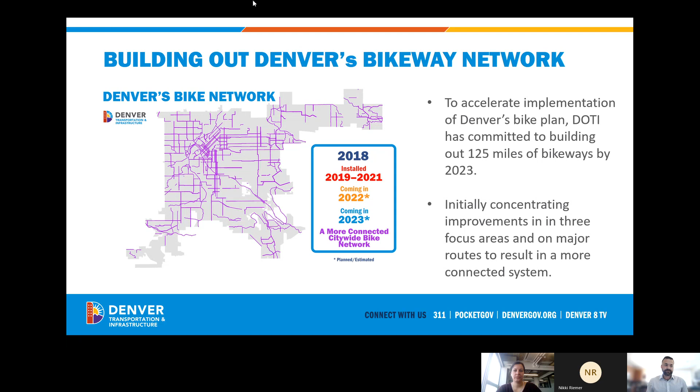Today we're really focused on the central area in Denver. I mentioned we're focusing on 3 focus areas. Currently for this presentation we're focused on central Denver, which includes 25 miles of bikeways identified from the 2011 Denver Moves Bicycles Plan, updated again in 2015. We started concept designs for these projects back in 2020 and then refined them through community input and outreach in 2021. The design and construction of those projects is broken out into 2 separate phases.

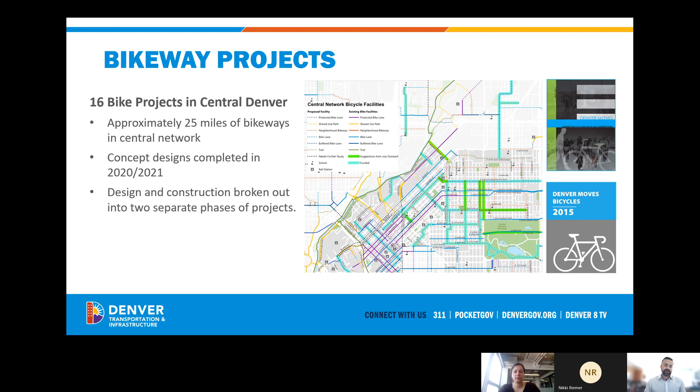There are a lot of different projects associated with this process. As I just mentioned, there were 16 of them altogether. So we have broken out the construction into 2 different phases.

In 2020 and 2021, we started and finalized the design for projects in the first phase, including the 25th Avenue Neighborhood Bikeway, Lawrence Street Neighborhood Bikeway, and the remaining projects listed here. We took these projects to the community last spring to get their feedback on the 60% designs, and those projects have continued to advance through the design phase and are now nearing construction.

So if you've been following this process and wondering when you'll start to see construction of those projects, the answer is relatively soon. These projects are scheduled to be constructed sometime this year, in 2022, and it's likely you would see them being constructed starting later this summer or early fall.

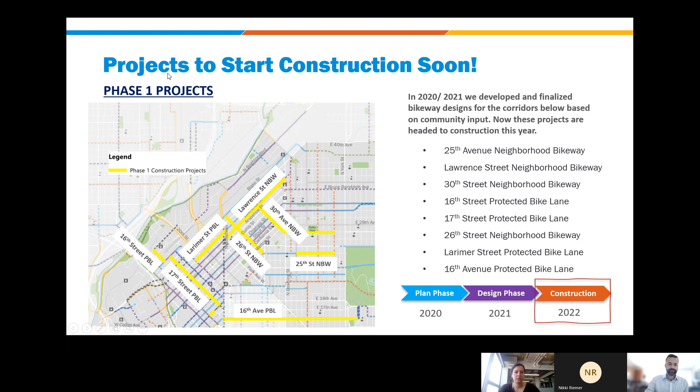For our second phase of projects, we're looking to get your feedback currently. We started the design and concept planning for these back in 2020, and they're now ready to advance to the final design stages, currently in the 60% design stage. These are the next round of projects we're looking for community input on, and they'll be headed to construction in 2023. We'll be getting community feedback, advancing the designs this summer, and these projects are planned for 2023.

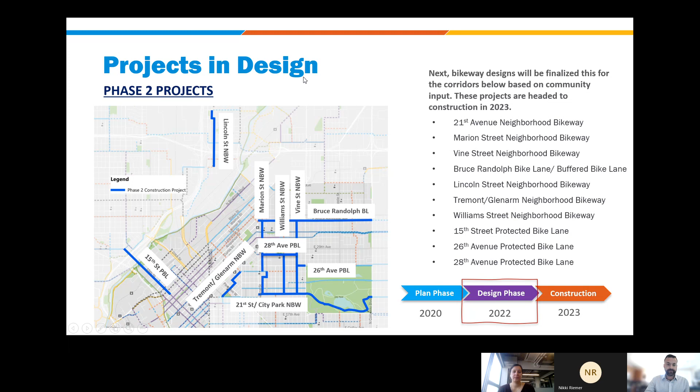Overall, as for the project timeline, this whole process kicked off back in March 2020, through numerous community stakeholder meetings comprised of various community organizations, neighborhood organizations, as well as active community members and community leaders. We've had numerous stakeholder meetings, and in addition, quite a few public and community meetings or open houses to learn about these projects and provide more feedback.

This is our 5th public open house on the Central Community Transportation Network process, and we look forward to wrapping up the final designs later this summer. As mentioned, you'll start to see construction of these projects happening this year and completing next year.

So I do have some major project updates, and that's what we're going to transition to next. The one project I want to start talking about first is Bruce Randolph.

Between Downing and Steele, a bike lane was originally proposed from the 2011 Denver Moves Bicycles plan. Based on some feedback we received, we looked into making this a protected bike lane, and that concept design was shared with the community last year as well as the year before. However, based on community response from that project, we found a need to balance the facility type with the needs of the community, so we've actually revised the designs back to a striped bike lane as it was originally proposed, instead of a protected bike lane.

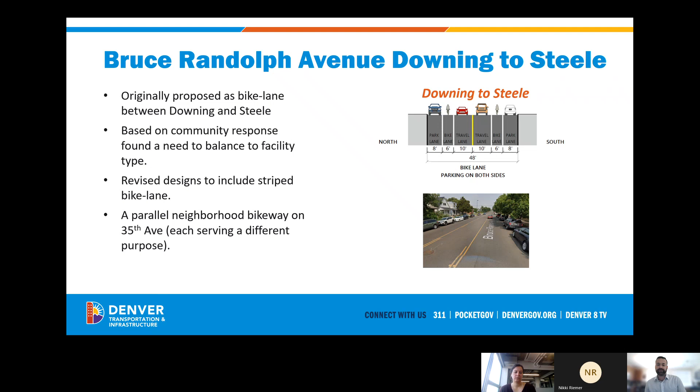On Bruce Randolph, providing a bike lane here will provide bicycle access to businesses. This will also increase the visibility of bicycles and pedestrians by slowing down vehicle speeds. By removing the center turn lane that exists today, this will help narrow the roadway and create a roadway character that discourages speeding and makes it more visible and friendly to both bicycles and pedestrians.

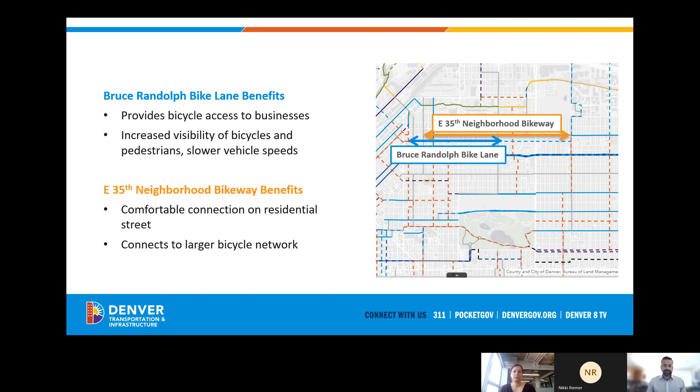For East 35th, this is proposed to complement the bikeway on Bruce Randolph by also adding a high comfort connection on a residential street that would do a good job of connecting to our larger bicycle network, as you can see on the map below. This bikeway would also connect to planned or recently constructed bikeways in the Central Park neighborhood and provide more of a regional connection. We see both of these projects as having benefits because while they're on different roads, they also serve different purposes.

On Steele to Colorado on Bruce Randolph, the street's a little bit narrower because we don't have the center turn lane in this section of the roadway.

What is recommended here, I'm going to point to this chart on the right of the screen. DOTI uses this chart to determine the appropriate type of bikeway based on traffic volume or speeds on a particular street, and that tells us whether it's appropriate for a neighborhood bikeway, a buffered bike lane, a bike lane, or something that needs to be fully protected.

Based on the numbers we were seeing for speeds and volumes on Bruce Randolph, that told us a buffered bike lane is more preferred or ideal on the street. In order to achieve that, removing parking on one side of the street would be an impact of being able to construct this project.

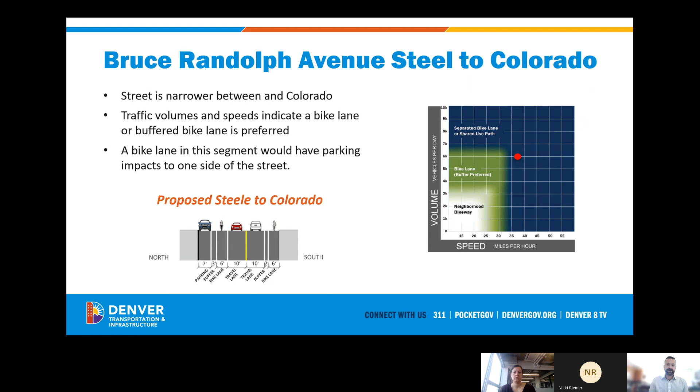Currently, what we're proposing is to keep parking on the north side of the street, based on data and some parking counts that I'll show you on the next slide.

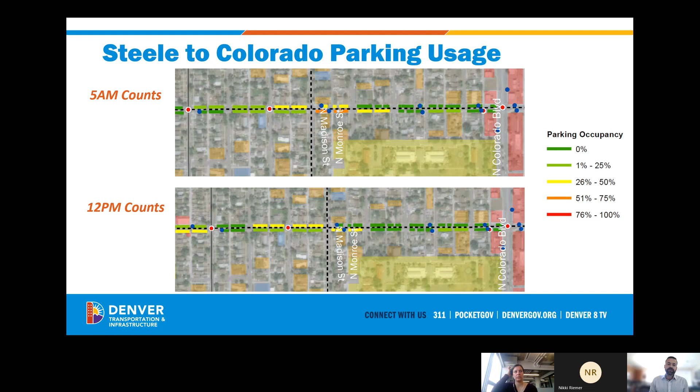Then for 26th Avenue from York Street to Vine Street, that's the next project I want to give a quick update on. This would provide a high comfort connection across York Street, connecting to the existing bike lane on East 26th that runs along the City Park Golf Course, and providing a safe, high comfort connection to the neighborhood bikeway that runs north and south on Vine Street. When we took a look at this, we found that the volumes and speeds of traffic on 26th indicate that a fully separated bikeway is preferred.

In order to fit either a protected bike lane or even just a bike lane in general, that requires removing parking on both sides of the street between York and Vine. So again, just because of the traffic volumes and speeds, fitting in a fully separated or dedicated space for bicyclists in this connection requires the parking removal.

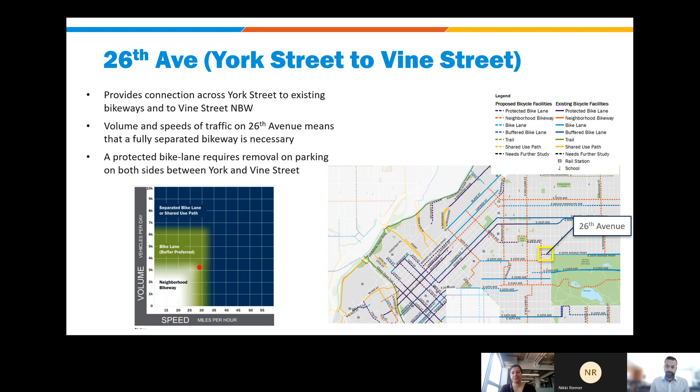A couple of quick things I wanted to point out for 26th Avenue. When we look at these projects, we're also looking at not only how we can make the street safer and more friendly for bicyclists, but how we can also make improvements for pedestrians as well.

One of the things incorporated into the design as part of this project are curb extensions, designed to increase visibility for pedestrians crossing the street, as well as narrow the distance a pedestrian has to cross. The other benefit is that these also help slow down turning vehicles, which improves pedestrian safety.

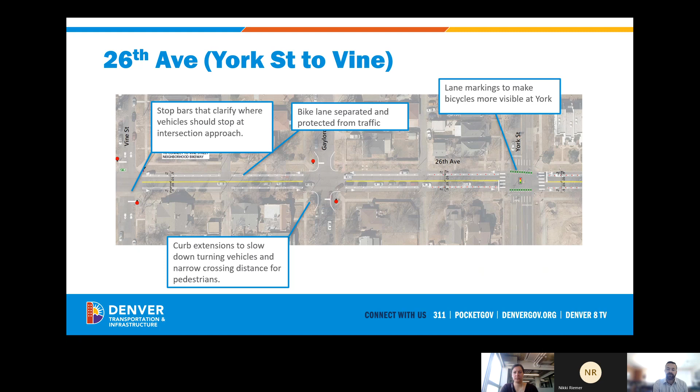A couple other things you might notice as part of this design are the protected bike lane, where bikes would be fully separated from and protected from traffic in this segment, and special lane markings that would help make bicycles more visible at York Street.

Again, we look at parking utilization when doing an inventory to understand when a parking trade-off is necessary as part of a bike project. We went out at 5 a.m. during the weekday to understand how parking utilization currently operates, and the graphic on the screen shows that parking utilization was fairly low during this hour.

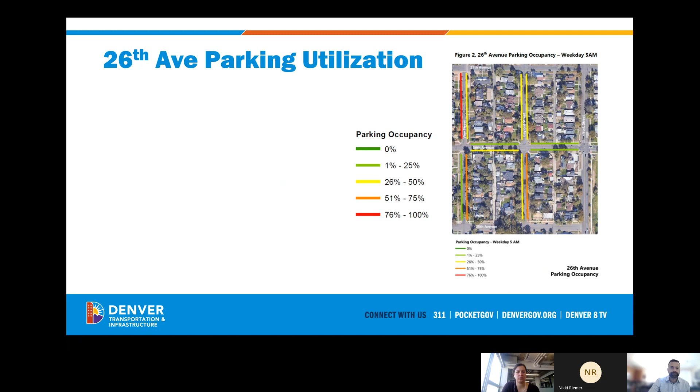The next project I'll update is 28th Avenue from Downing to Vine Street. This again is proposed as a protected bike lane, providing a connection overall to our larger bicycle network, creating connections between 5 Points and some of the north-south routes currently on the screen. A concept for this project was developed through community input in 2020.

On this street, although volumes are pretty low, speeds are just a little bit higher than we'd like to see. That's why a protected bike lane is proposed. Adding a protected bike lane would help narrow the roadway, and putting in bike infrastructure to narrow the travel way has been shown to reduce vehicle speeds. So one benefit of providing this protected bike lane is slower speeds and a higher comfort street for both bicycles and pedestrians.

In order to achieve a protected bike lane on 28th Avenue, parking impacts are expected on the north side of the street, based on needing to make that trade-off in order to make the bike lane fit into the street.

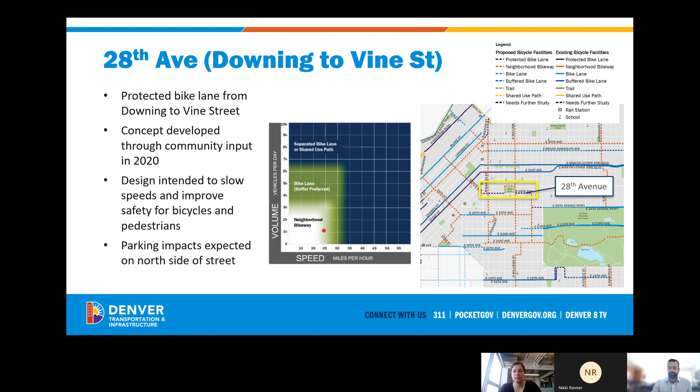We looked at the parking utilization on 28th Avenue during 5 a.m. Between Downing and Vine, you'll see on this image what the parking utilization looked like.

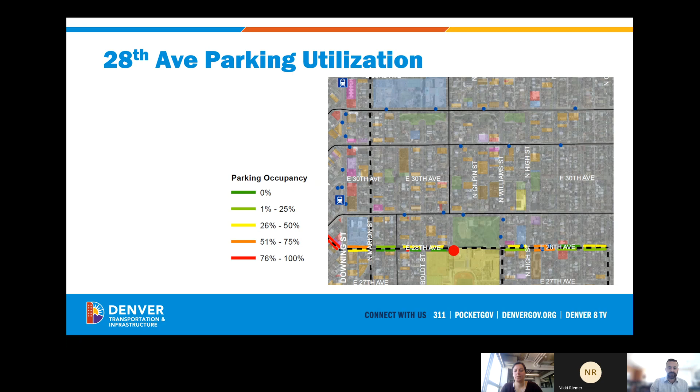So just to quickly show some design features, this gives a preview of what the protected bike lane would look like. We'll also be adding curb extensions, like described earlier, to increase pedestrian safety and visibility. This diagram also shows where the parking would be removed and the overall design of the protected bike lane.

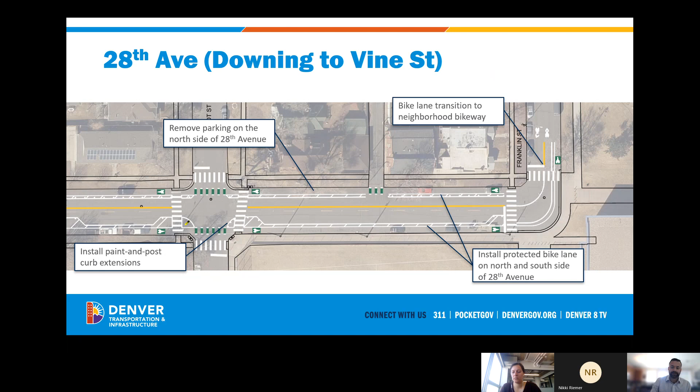Next, we're going to be talking about 60% designs for the remaining projects, which are all neighborhood bikeways. We have quite a few projects that we're looking for feedback on, and we have a special tool we'll talk about in just a moment that allows you to go online on your own time and provide comments on those designs. But first, I'm going to transition over to Nikki, who's going to talk about the remaining projects.

And she's going to start by talking about what a neighborhood bikeway is, just in case you need a reminder. Yeah, thanks, Riley. Do you mind muting? I think I got feedback.

Okay, great, thanks. So what is a neighborhood bikeway? Neighborhood bikeways are typically installed on streets with low volume and speeds, and they prioritize people walking and biking. Some things that can be implemented on roadways to ensure lower speeds are speed humps, traffic circles, curb extensions, and median refuge islands.

Oftentimes a lot of these streets aren't cut-through streets, they're more local streets. So we look at the volumes on the roadways and install things like diverters and speed humps as well if needed on those corridors. Neighborhood bikeways really focus on what improvements we can make at intersections and what we can do to slow speeds down mid-block.

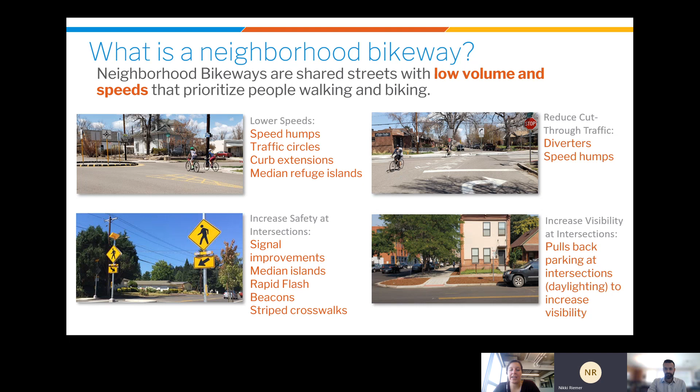Lastly, on the intersection front, I'll talk about this more later, but we use this jargony term called daylighting. Basically this means pulling parking back at intersections. You can see in this photo the no parking sign and the cars parked behind that. Those are typically placed in strategic locations so they're not so close to a pedestrian crossing that pedestrians aren't visible. We're looking at that on our corridors as well, to make sure peds and bikes are visible when crossing intersections.

So I am going to go through the neighborhood bikeways that are currently in the 60% design phase that we're looking for your feedback on. In the interest of time, I'm not going to go through each intersection and what we're proposing at each one. Riley will go through the tool you guys can utilize to look at the designs and details and provide your feedback. But I'll just go through the key features and, since the last time you heard about this project, what's changed.

So the first one is 21st Avenue Neighborhood Bikeway, and that extends from Downing to Colorado Boulevard. Some of the key features on this corridor are overall general traffic calming and curb extensions installed at Williams Street and Marion Street, and in several locations along the corridor with marked crosswalks as well. What's changed since last time you saw this concept design is that we've added a traffic circle at Gaylord Street and an eastbound traffic diverter at High Street as well.

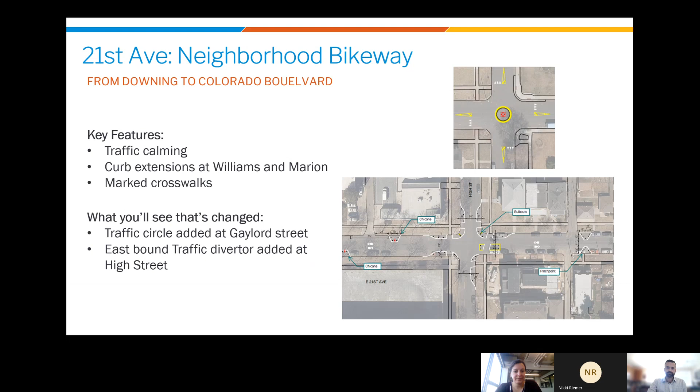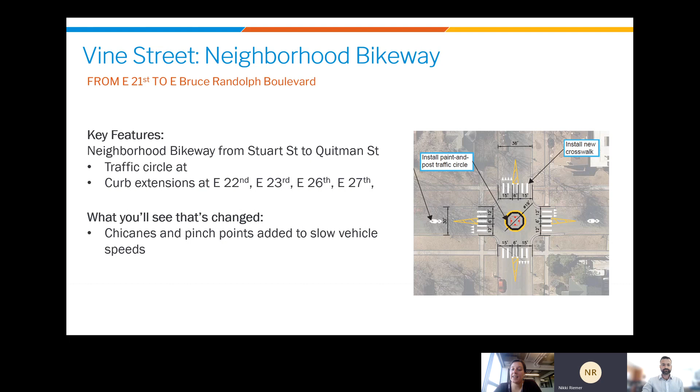The next corridor is Vine Street, and this goes from 21st Avenue up to Bruce Randolph Boulevard. On this corridor, there are traffic circles located along it, as well as curb extensions at 22nd, 23rd, 26th, and 27th. What you'll notice in this design compared to the last concept design is that there are locations throughout the corridor with chicanes and pinch points to help slow vehicle speeds along the corridor.

The next corridor is Williams Street, and this extends from 21st Avenue up to 31st Avenue. Some key features on this corridor include a traffic circle at 30th and curb extensions at 22nd, 23rd, 26th, and 27th. Again, similar to the Vine Street corridor, you'll notice more speed mitigation measures installed on this corridor, like chicanes and pinch points.

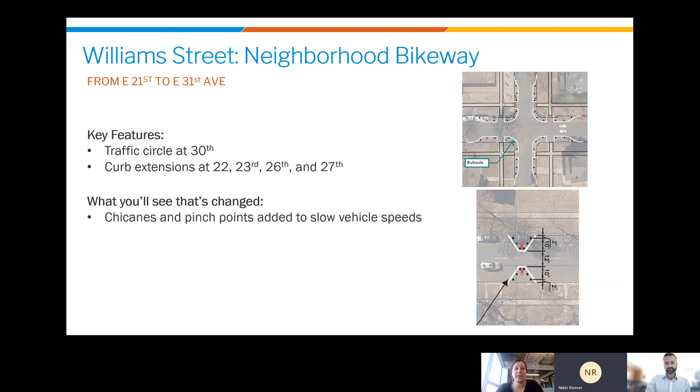The next one is the Marion Street Neighborhood Bikeway. Key features on this corridor include a traffic circle at 30th, curb extensions at several locations including 21st, 22nd, 23rd, 25th, 26th, Bruce Randolph, and Martin Luther King Jr. Boulevard, as well as a pedestrian refuge island installed at 24th Avenue. Similar theme here, you'll also see chicanes and pinch points added on this corridor to help with slowing vehicle speeds.

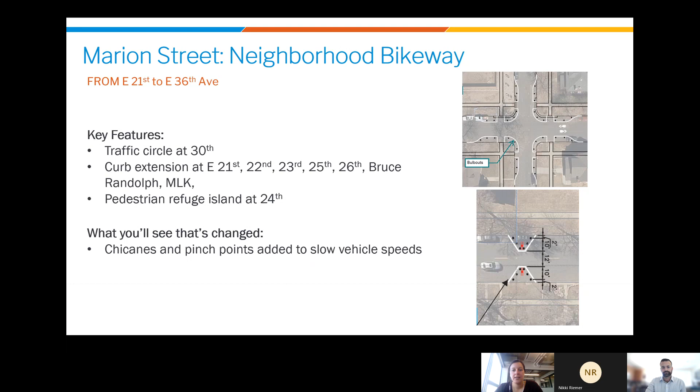And then lastly, the Tremont Glenarm Place Neighborhood Bikeway. This extends from 20th Avenue to Washington Street. There are several traffic calming features on this corridor as well, such as chicanes and pinch points. Also, the other thing we proposed on this corridor was closing the slip lane at Tremont and 20th Avenue, and also a traffic circle at 24th.

Some things you'll notice that changed: we're now proposing a westbound traffic diverter at 22nd Street. And this bottom picture displays a new ramp to connect the neighborhood bikeway along the shared use path, connecting to the 22nd Avenue bike lanes.

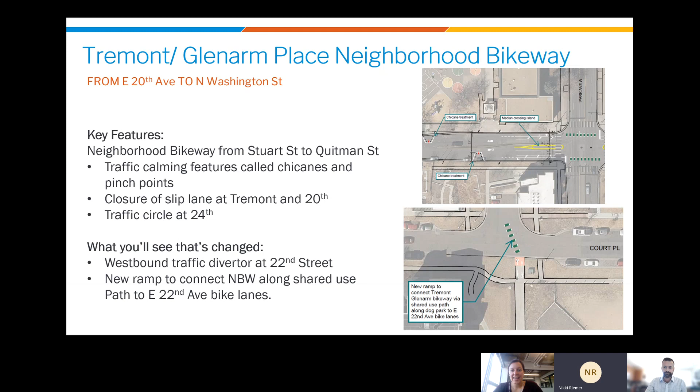So with that, I think that's the last one. I'll turn it back over to Riley to show you how to leave comments.

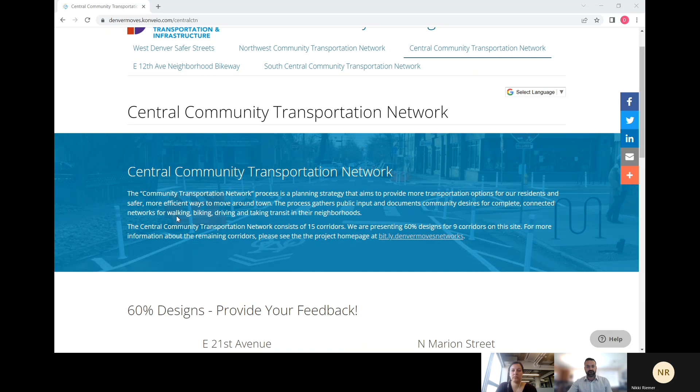The link for this is bit.ly/centralCTNcomment, and that will take you to a page that you see on my screen here. This provides an overview of all the different projects that we're asking for your feedback on. If you go to that page, you'll see all the different projects we just talked about earlier, listed along with the extents that are shown.

If you want to see the design or more information about a particular project, all you have to do is click on that project. For example, I'm going to click on Vine Street and hit View 60% Design. That will take me to the information page about the Vine Street Neighborhood Bikeway. You can read more information there about what a neighborhood bikeway is, as a reminder, and it talks about some of the different design components.

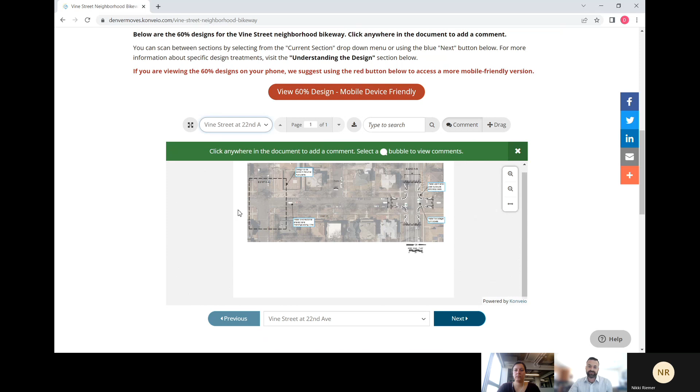In the middle of the page, it will show you the design. What I recommend doing is, if there's a particular section of the street you're most interested in, you can click on this table of contents, and it will show you the different sections of the design. So let's say I was really interested in knowing what was happening at Vine Street between 25th and 26th Avenue. I would click on that here, and that would pull up the design.

You can also use the magnifying glasses to zoom in, so you can see a little bit more information about what's actually happening on the design. We also have notes that indicate what all the different design features are.

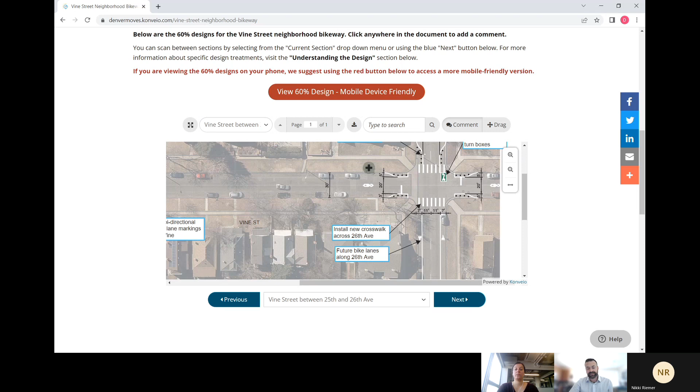If you wanted to add a comment, it's actually really easy. All you have to do is click anywhere on the page, and you'll see this little plus symbol show up. You can click on the page, and it allows you to add a comment. It is really important after you make a comment to hit Add Comment — if you don't, it will not save the comment. So once again, make sure that after including a comment on the page, you hit Add Comment to be recorded.

If you're viewing on a mobile device, you can also click on 60% Design Mobile Device Friendly. That will bring up a page that is a little bit easier to read on a phone.

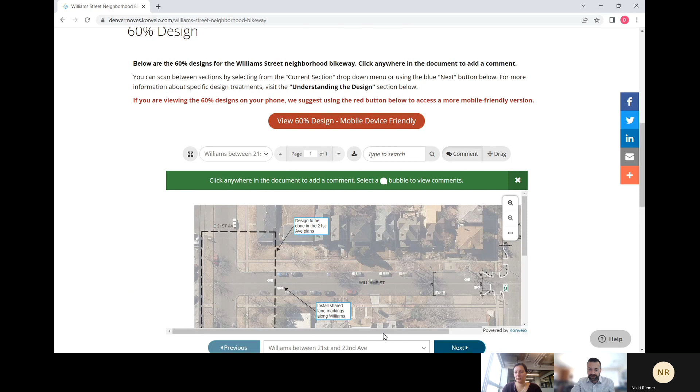So just to go through one more of these, let's say I want to look at North Williams Street, so I'll click on that. I can click to zoom into the design, and I can add my comments.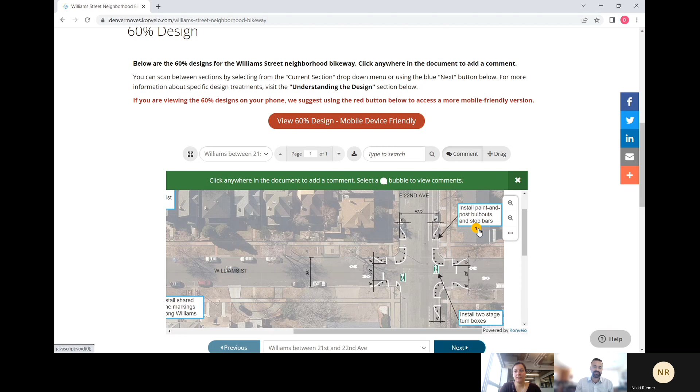Once a comment is made, you'll see it posted there, so you can go back and see the comments your other community members or neighbors have left on those pages. If you would like, you can upvote one of those comments, so you can like a comment if it's something you agree with. That's how to use this overall page.

I'll also point out that on the main design page, there's a reminder about the email address, the project hotline, and how to sign up for office hours. So with that, I'm going to transition us back to the presentation real quick. Just a moment there.

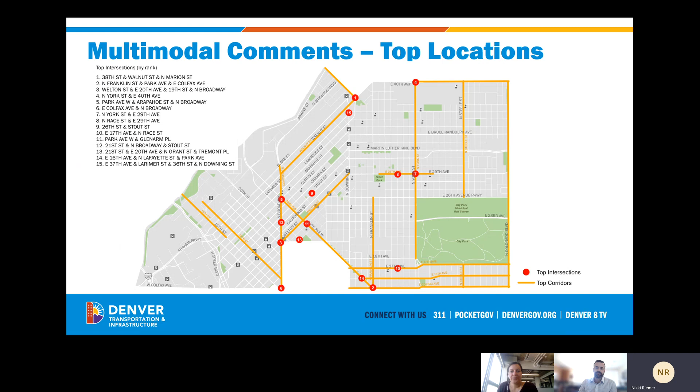So we narrowed down this list even further, which is this next map here. On this map, all of the orange dots and all of the blue lines are locations that we actually collected data on, studied in depth, and came up with recommendations.

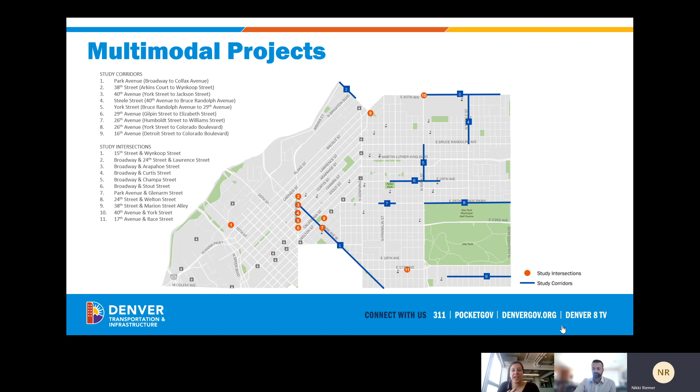To go through a summary of what some of our recommendations were, we've got them summarized by both intersections and corridors. This first slide, I'll just go over intersections at a high level.

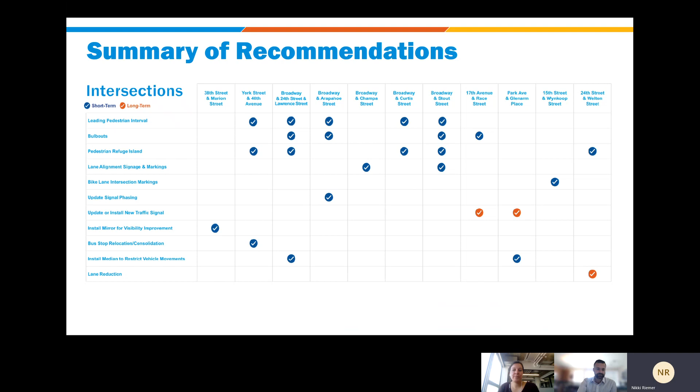One thing to note is that there's a PDF posted on the project website that goes into more depth. I'm not going to go through each intersection and what each of the improvements were, but you can use that PDF to take a more in-depth look yourself. As you can see, there are locations where we're proposing new crosswalks, leading pedestrian intervals, and bulb outs.

All of our recommendations are categorized as short-term and long-term improvements. And just to be fully transparent, for these short-term and long-term improvements and recommendations, there's currently no funding for them. So the timing for when we'll actually see these implemented is uncertain, and wanted to make you all aware of that.

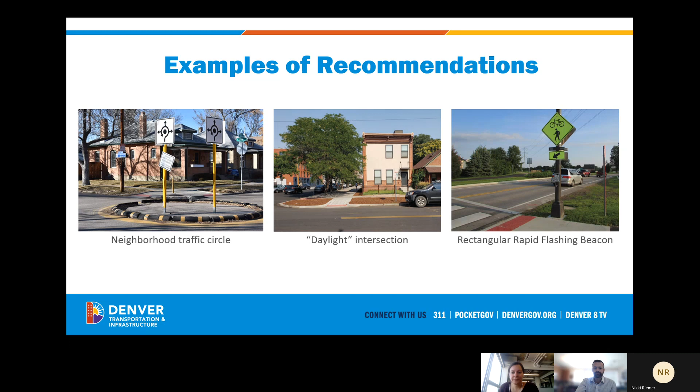And then just some other recommendations. We don't have pictures for all of these, so I'll just name a few: things like installing a new traffic signal or new signal infrastructure on existing equipment like pedestrian signal heads, wayfinding signage, bus stop relocation—of course that requires coordination with RTD—as well as all-way stop signs and stop sign flips and things like that.